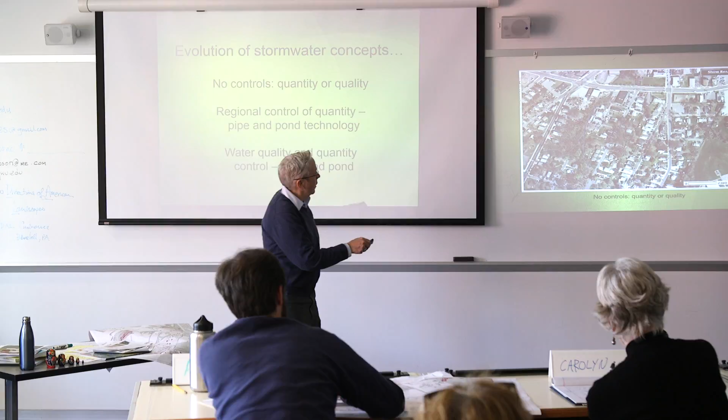So back in the day, they didn't manage anything. There's a stream that runs under this driveway, under this road, right up through these backyards, up into here. Looks like it might even go in a channel right there.

So there's no stream buffer, nothing. This applicant right here comes in, looks like a garden center or something, and says they want to do some development. And we're saying, well, you owe us, this is inside the beltway, so they would owe us a 60-foot buffer on that side. We're not going to make them take out half their business to put that buffer back in. We'll try to figure out a mutually agreeable, negotiated solution, but there's just not a lot of hope for doing restoration right in that spot.

But what we might ask them to do is go up in this system and look for places they could stabilize it. Because the water coming in through their property, if it was more stable, cooler in temperature—we talked about those things. So we'd ask them to look for a place up here where they could do some compensation, because they can't do the buffer on their property.

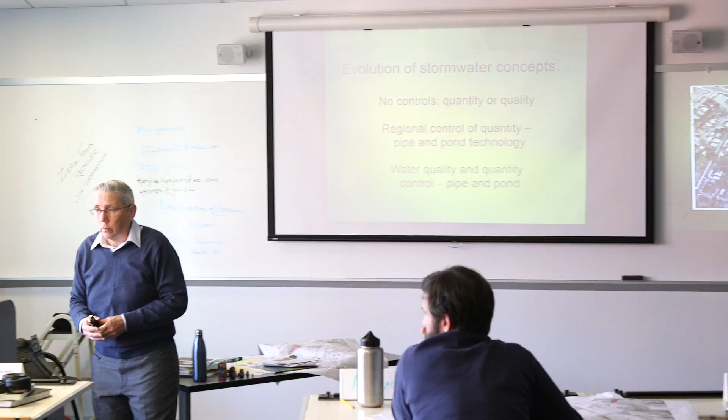You can only ask for that if they're doing renovations, right? Right, if they're coming in for a permit. Good point. Yeah, it's not self-implementing—you can't ask them after the fact.

No, we can't go in there and say you got no buffer, you got to shut down right now. If they come in and ask for something, we can say this is supposed to have a buffer, let's find a solution. Especially if it's something minor, we might not even say there's any mitigation needed at all. We might just say, oh, you're just coming in for a sign permit? You're good to go.

So originally there was no quality or quantity requirement. I would really like you to look at your watershed, your project, wherever you're going to be. Is there stormwater management? Because in some places there won't be.

So then we decided we had the solution. We said, well, let's do these regional ponds. There's a couple in Montgomery County. There was a whole plan to do like 100 of them across Prince George's to share the stormwater burden. You're thinking that's probably not such a bad idea.

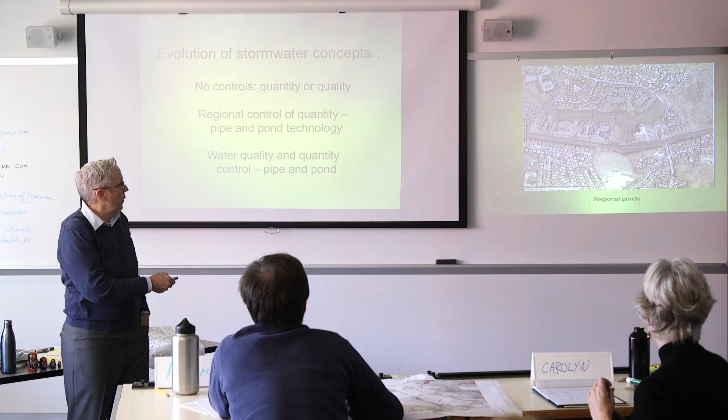So what they used to do is, you can see there used to be a stream here, and now they built up the road, so that's a dam. The dam, or the road, holds the water back, just like any other dam structure. And then here's the lake. It's very nice. There's a high-rise apartment building right there, and all these townhouses and some single families. Very nice development, right?

This was done probably in the early-ish 80s when they were first looking at regional ponds as a good solution. So this development's been here for a while.

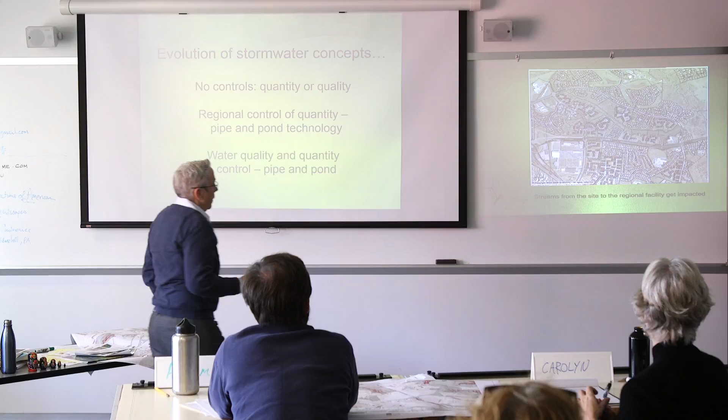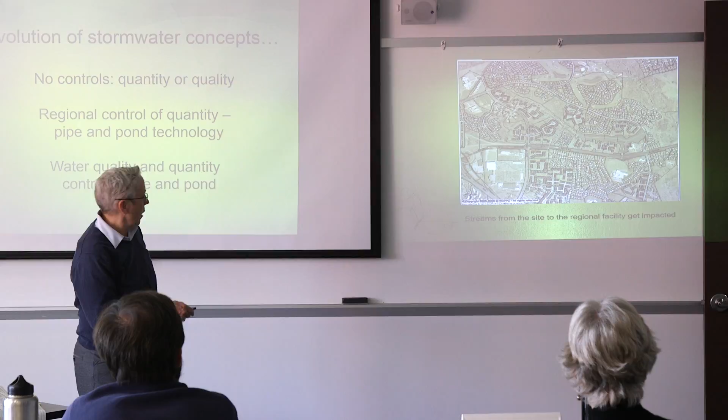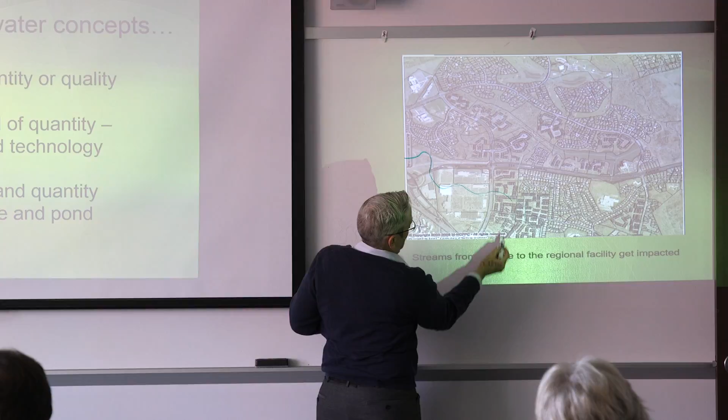So I'm zooming out a little bit. Here's the dam, and here's the lake. And you can see this line here - wow, it really doesn't show up - that's the watershed boundary, just like you delineated the watersheds.

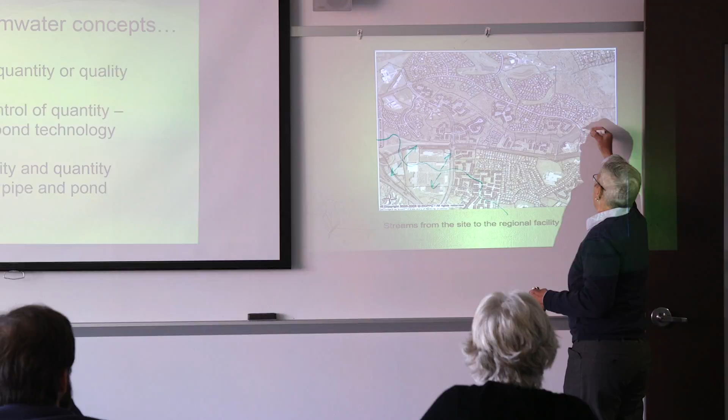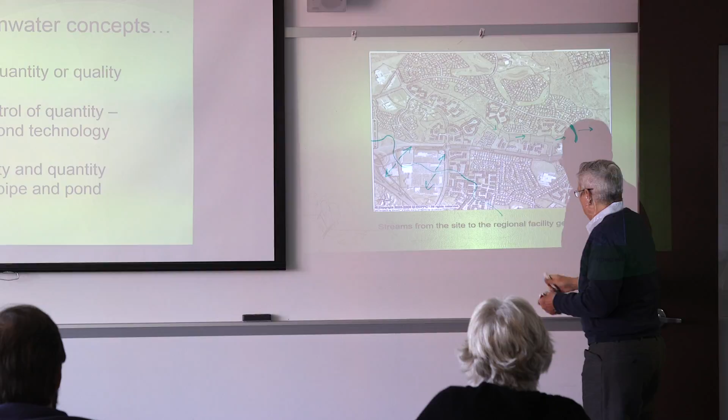So when they were designing this lake, they had to figure out how much volume and where it's coming from, and is it impervious surface or whatever. So that's coming this way. This is the dam, and this is going this way. So there's the lake here, and that's how the water is flowing off the properties, into this lake.

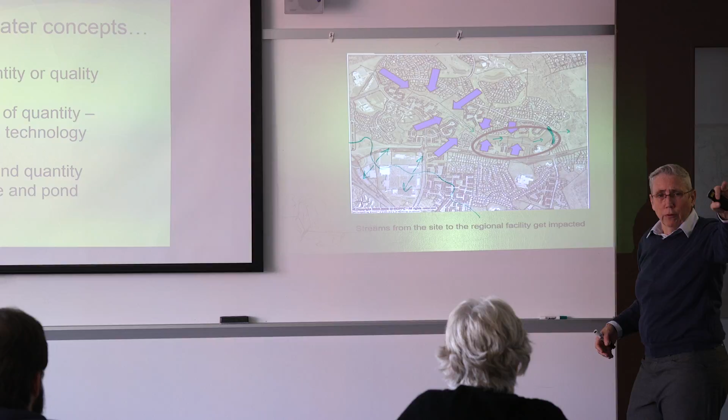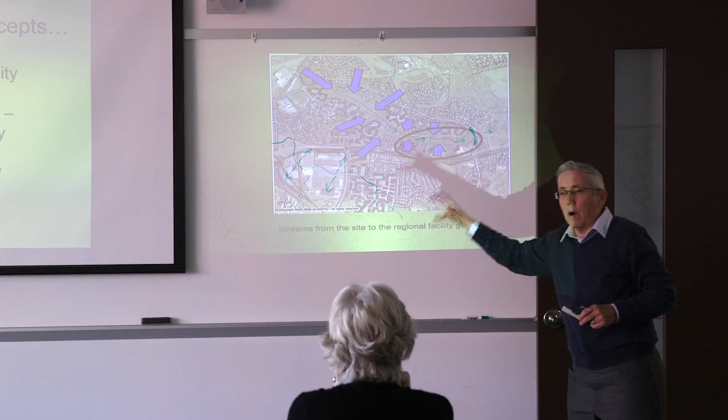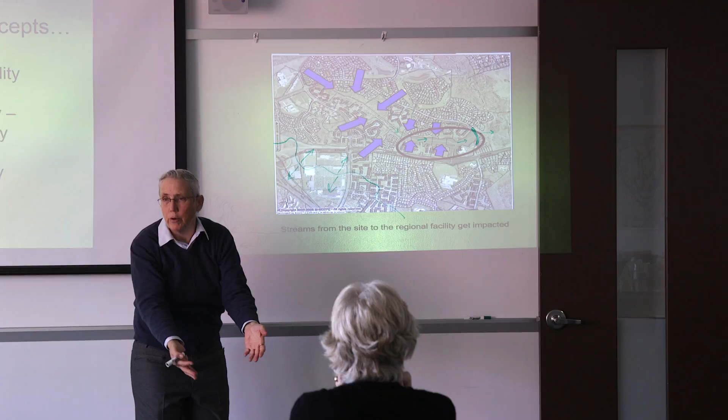But what we found, now that we've had like 20 years to look at this development and see what's happening - in Reston, Virginia, anybody familiar with Reston, Virginia? Planned community, they're finding the same thing, we're going to talk about them later - is that these streams feeding into this lake are becoming completely degraded. They're falling apart, their water quality is terrible, and that's because it's not a natural thing for these streams to get all this runoff with no treatment. So these streams are receiving water just running off of parking lots, running off of backyards, picking up dog poop, the whole thing, running right into the stream that then runs into the lake.

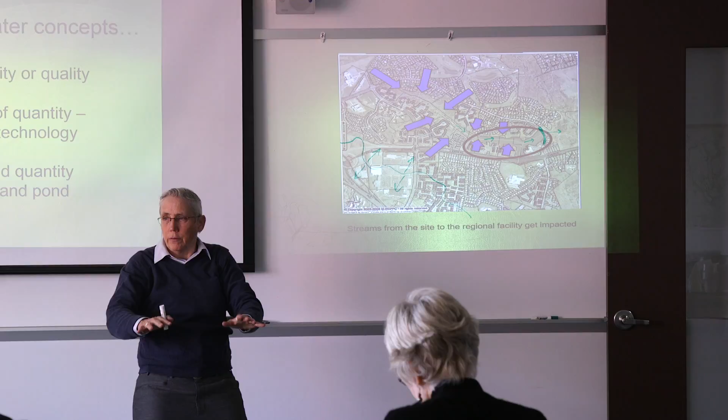There's no treatment up here. That's how the regional pond system works - they're relying on the pond to let the pollutants settle out, and that's what happens. They kind of settle because they're heavier than the water. And the wet ponds are better at cleaning up water than a dry pond situation is.

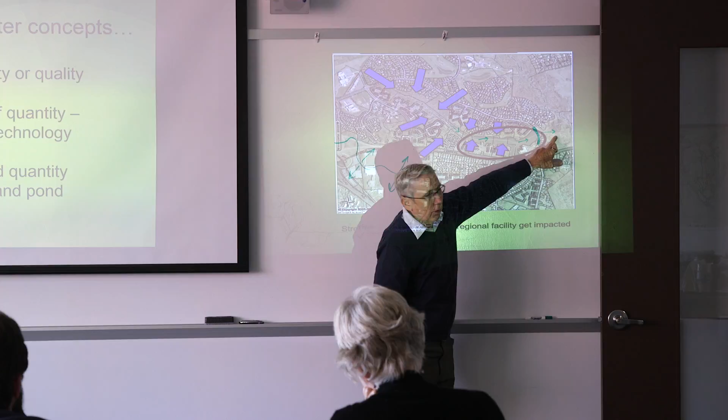So it slows it down. One bad thing is the temperature - temperature definitely goes up because it's all exposed to the sun, and when the water runs out under the dam, it's a fairly high temperature. So it's really messing with the ecosystem of that stream. It's completely gone, obviously, where the lake is, right?

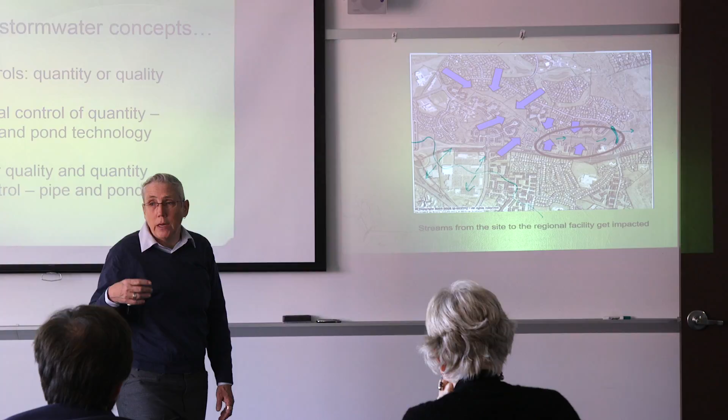So all of these streams now need to be stabilized. That's a huge amount of money. And Reston is doing it right now because they did the same thing in the 70s and 80s - they came in and built Lake Anne and all these little lakes around Reston. They're having all the same issues, and it's a huge multi-million-dollar issue to have to deal with. Nobody wants to do that.

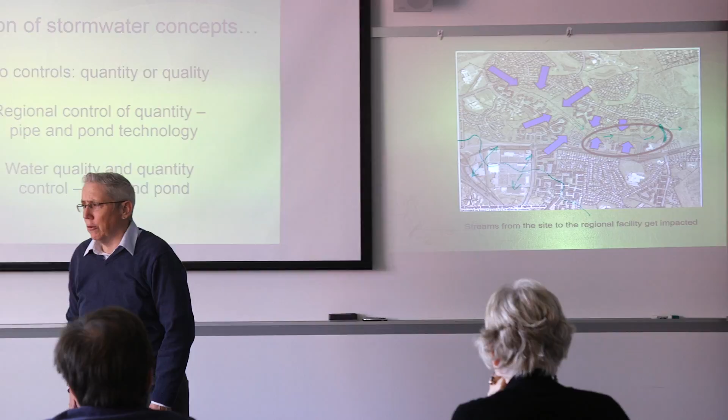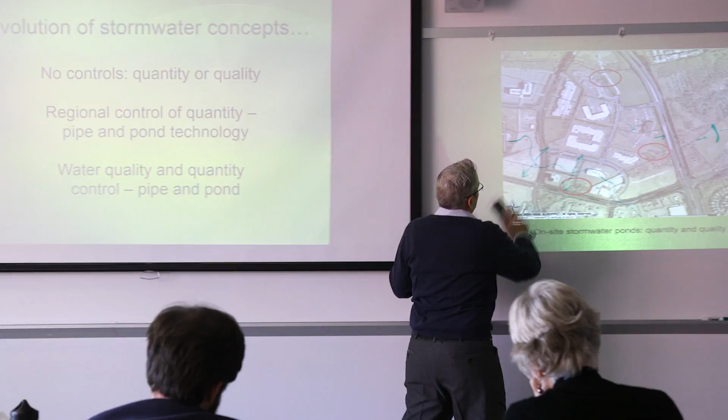So, regional ponds, not the solution. Throw them off the books. We're learning - it takes us a really long time, but we're learning. So then we said, okay, the solution is to have every single site, or if they're cooperating a couple of sites together, do their own individual stormwater management.

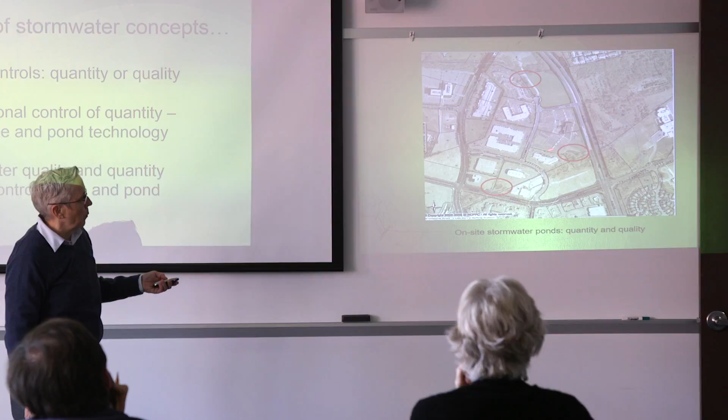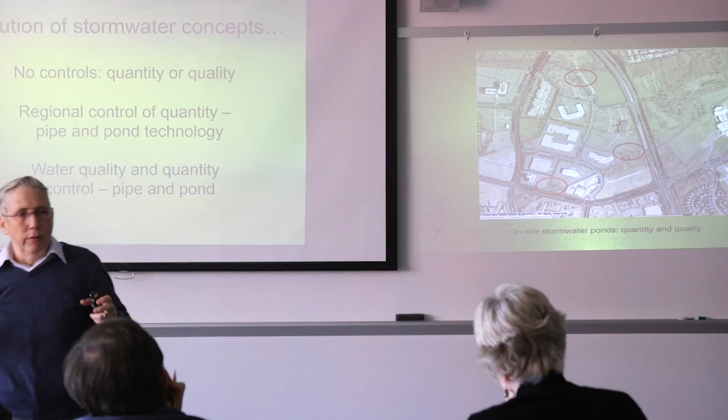So there's this for this piece right here. There's this for this monstrosity with all this parking that comes to here. Here's this one for these 4 buildings. So they're stormwater management ponds, which I always thought was a funny thing to call them because they're usually dry. So it's a dry pond - military intelligence, cafeteria food, kind of not the same, right?

So the idea was to capture it closer to the site, right when it's coming off the surface, but pipe it all to one facility that grabs it for either just your property or a couple of properties and holds it for a time to let some of the bad stuff fall out, then discharges it to the stream.

One hot mess. It's hot, it's still full of pollutants, it's a problem still. But the erosion that happened to the other streams was managed. This was mainly, especially at first, only focused on quantity.

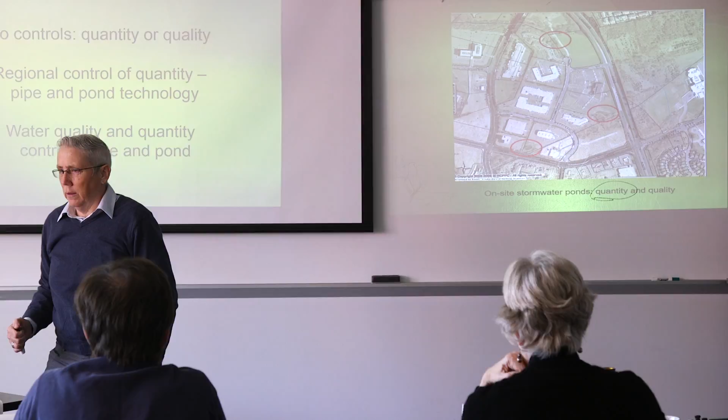They didn't care about quality because quantity was the overriding issue at the time, right? Oh, we got all these volumes, we're having these big storms, they're blowing out streams. What are we going to do? We're going to manage quantity. And if we get some quality benefits along the way, okay. Quality was never the issue during this time period, 70s, 80s, even into the 90s. It was just managing volume.

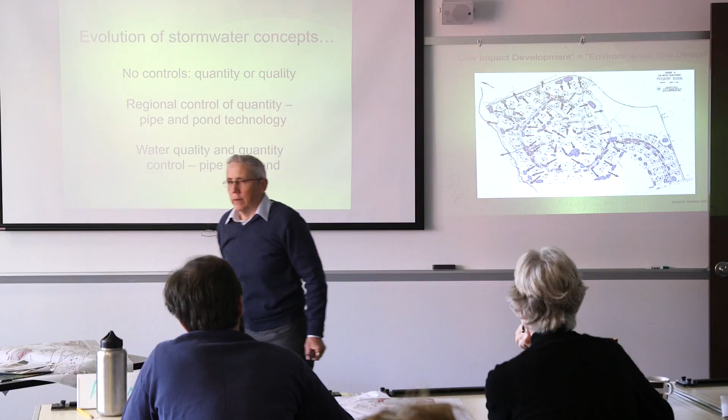So then we said, oh my God, Chesapeake Bay is still killing us. Or we are killing it. We got to do better. And the water quality reports start coming out. Dead zones in the Chesapeake Bay. No oxygen, plants dying, fish dying. Oh my God, we got to do it better. This is terrible. We're not making it work the way nature would intend. We are not biomimicking this right.

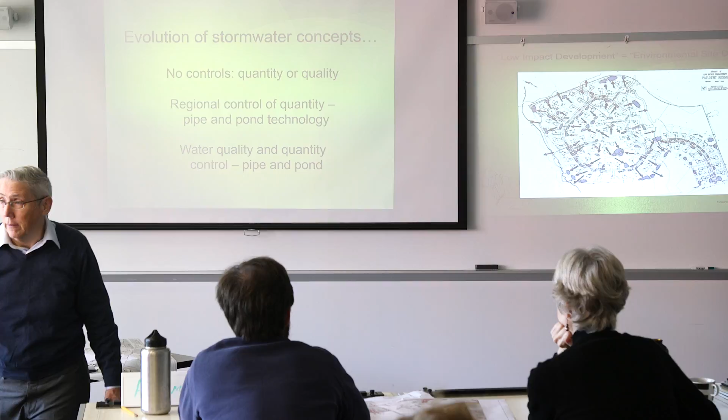I don't understand which part of this costs their money. You said it costs a lot of their money. The developers pay for that? Yeah, why this, the streams was stabilized and that cost money, why? I don't know. Okay, because what happened here...

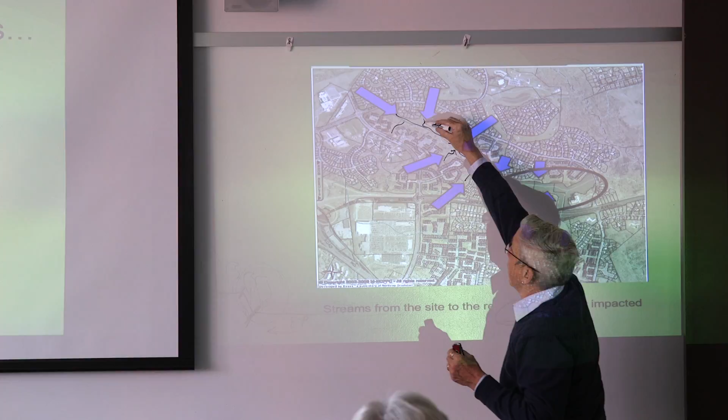So let me draw these in. So these are all, like we saw on our map, these are all streams that go into this way, that's going this way. Okay, so those streams would normally be very stable, the sides would be normal, it'd be all good.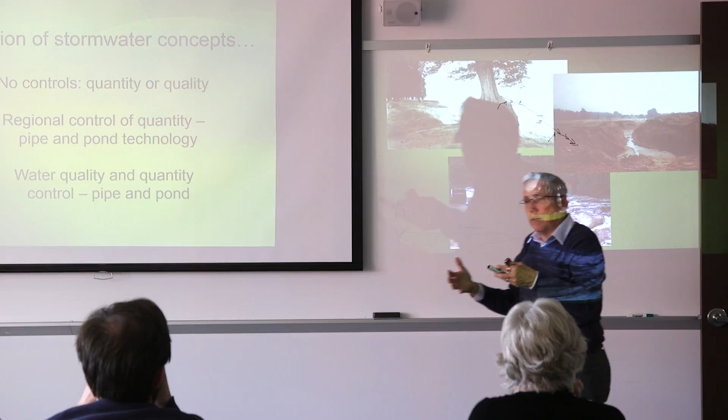This is kind of an exaggeration because there's still trees on both sides, but this is what happens. So to restore this and stabilize it, you have to go in, and there's a lot of different methods, but one way is to bring in some stone and plant trees in and around it to regenerate the stable sides that there were.

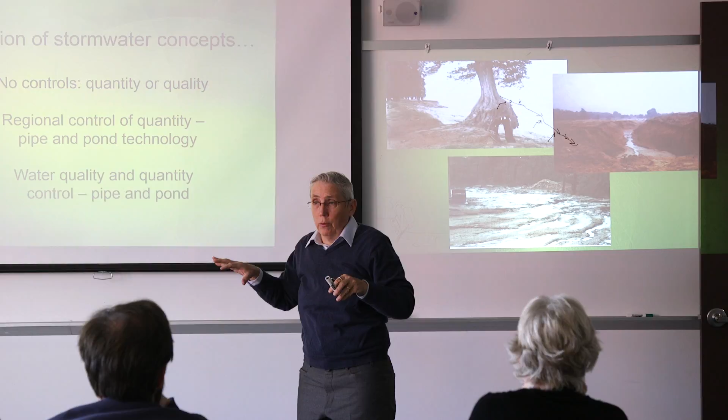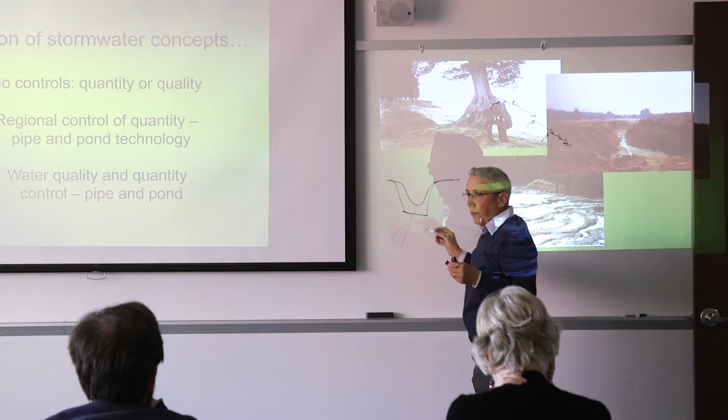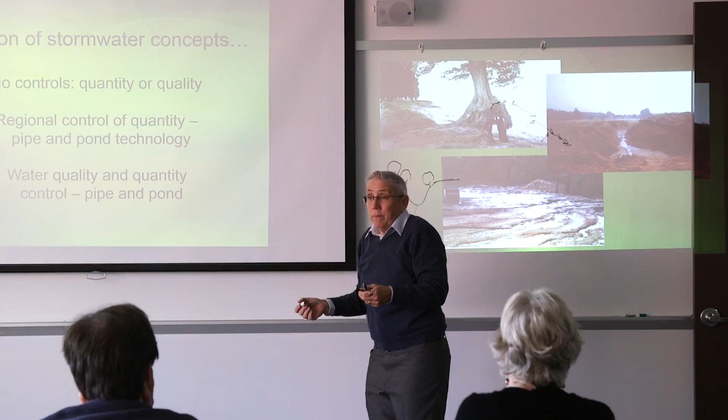So what happens is the stream in cross section, as you're looking, here's the water trickling out, that might be how it looks normal. But then after all the erosion, you've got steep banks on both sides with no trees, nothing left, it's all eroded. So you have to come back in and make it work again and plant trees. And that costs money to get all that stabilizing.

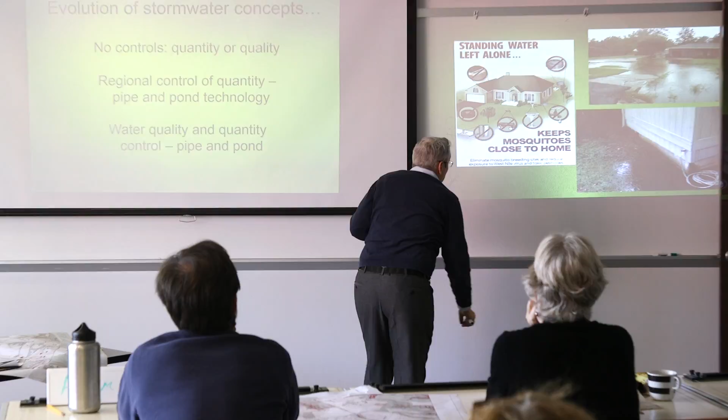Is that helpful? Okay. Yeah, don't ever hesitate to stop me because I speak a language of land development that I've always spoken, so I don't know when I'm off on a tangent, or not erasing my arrows. Okay, so enough of the trash.

So you see how it evolved. At first it was volume, then it was like, we really got to take care of the quality of the water because things are really bad. So then we said, okay, low impact development. Have you heard this term, low impact development? It mainly was focused on stormwater. And it's still kind of, in its definition, more just 100% stormwater.

So environmental site design is the term that the state of Maryland uses. It's also about stormwater, but it's also about saving native vegetation, reducing grading, which low impact development also was, but it's neither here nor there exactly what these terms mean. I just want you to be exposed to them so when you see them, you're like, oh yeah, that's stormwater.

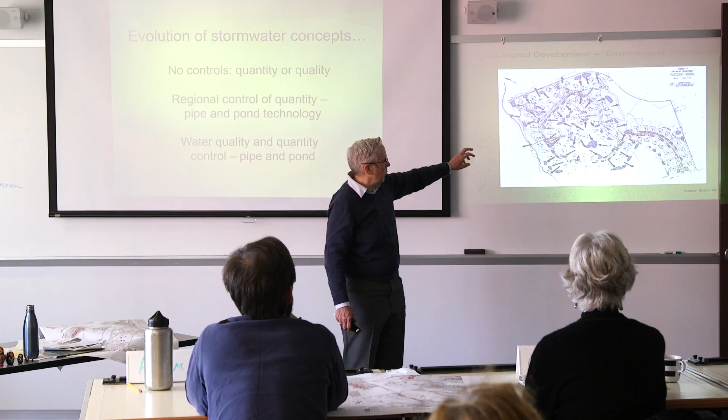Micromanagement. So I love this because this was the first subdivision done in Prince George's County, I think in the early 90s. That was the first one done using this technique. Hugely controversial because some people didn't like having these retention areas and vegetation on their property, but for the most part it was very successful.

I think it's interesting because I Googled it and it was on Boston's Metropolitan Area Planning Council website. So we're like, all right, Boston, you're taking the stuff from our county, that's cool.

But this micromanagement is what they did in this design. So even today, I think last year I pulled this up, I went into the aerials just to see, are these places that were supposed to be preserved still there?

Well, they are. Here's some tree preservation. That's a little rain garden that's capturing stormwater to get it to go into the ground. Same here, same here. For the most part, the system's working.

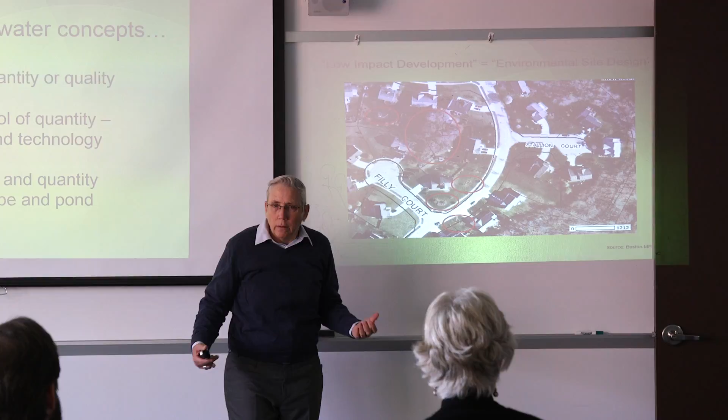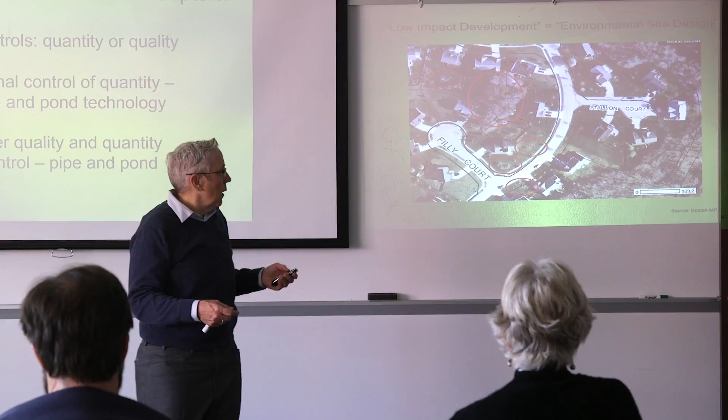They did have to come back in, because they didn't calculate the volumes correctly. So they had to come in and do a stormwater pond in the end. Which was kind of disappointing because you always want the first one to work, right, so that everybody says it works. But it's always an iteration. You have to come back and go, well, what didn't work, and we're going to do it better next time. And we certainly have over the years.

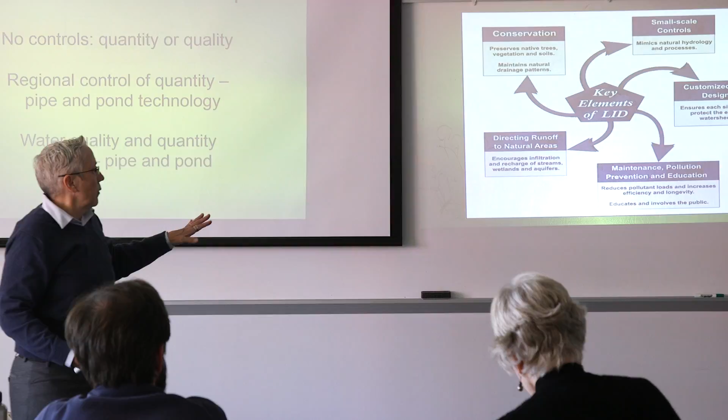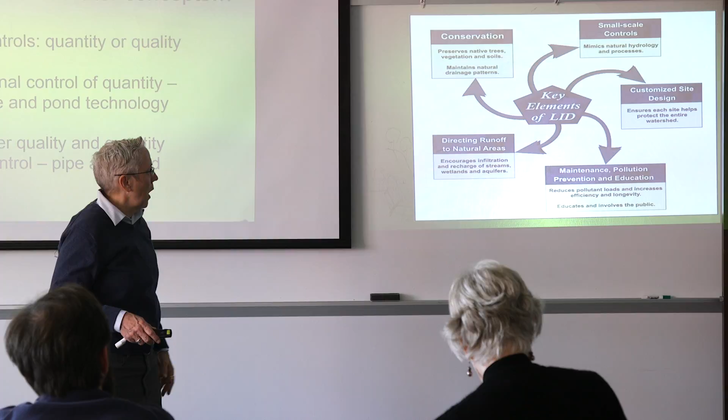So here's low impact development elements. You really start with this one right here: preserve native trees, vegetation, soils, maintain natural drainage patterns. This assumes you're going into a brand new site, never been developed before. So it's a little harder to do some LIDs using that one because you're not dealing with a fresh site.

Then you've got small scale controls. Mimic the natural hydrology and processes. Biomimicry, right? We're getting that water down into the ground as quickly and as efficiently as we can.

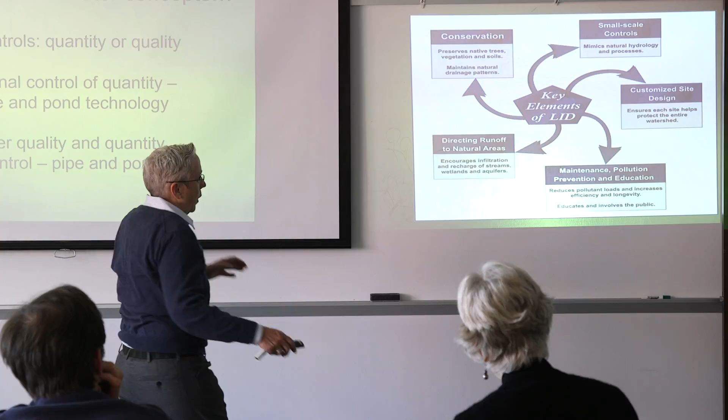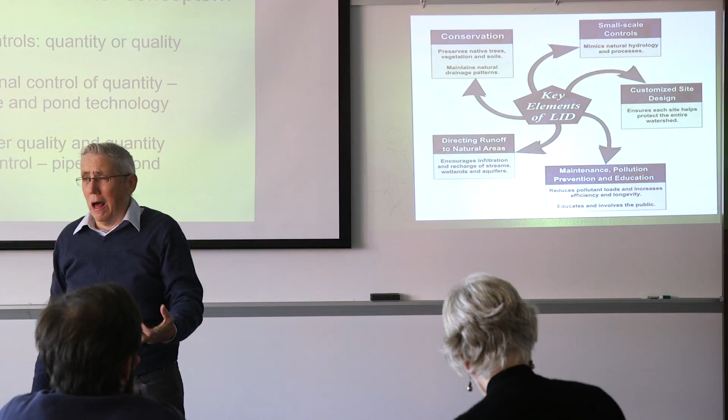Then you customize that site design to protect the entire watershed. You know how many subdivisions I saw that were just so poorly designed, they were just trying to get as many lots on there as they could for the client. I get it. But there weren't good decisions regarding which way the water was flowing and how the sites would be affected. Really important.

Probably the most important thing that wasn't very successful on that first subdivision was educating the new owners about what these things were. They also were not placed in conservation easements, which is what they do now. They also generally don't put them on individual lots, because you're relying on the property owner's willingness to maintain it, and that's just not happening.

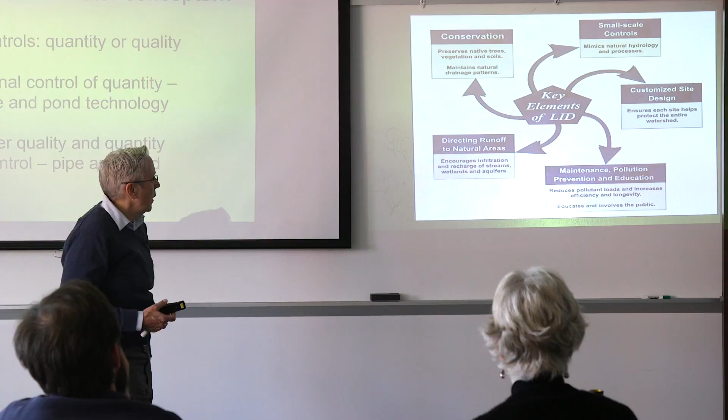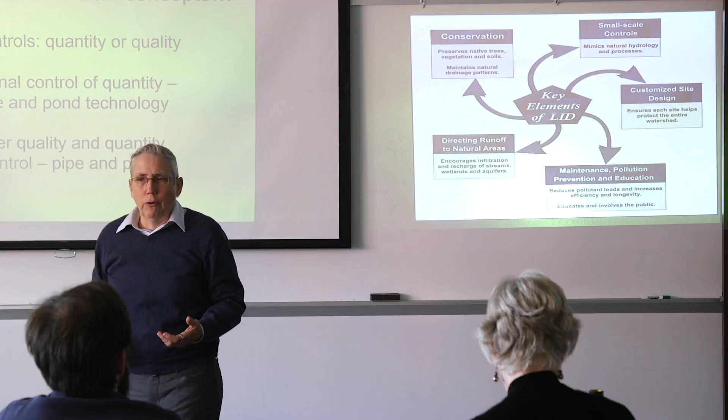So maintenance is very important, and then education, and then directing runoff to the natural areas. That's part of it too, but you have to have natural areas to be able to get the water to them for that to work. So good stuff. All right, so what does that look like on a site?

How does one keep, is it a problem in those retention ponds to start mosquito populations?

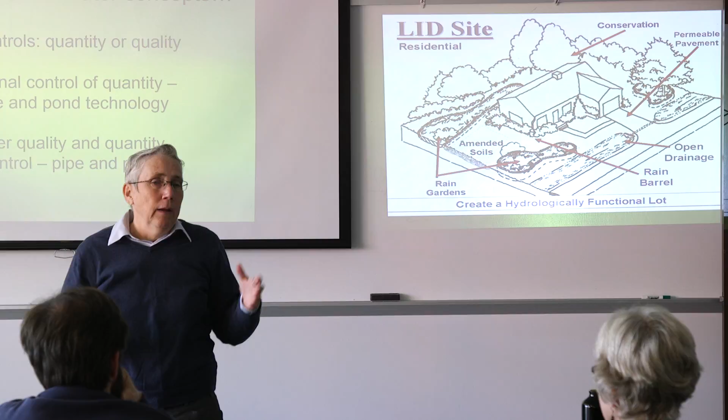What I always say about that is, if you have an efficient, well-balanced ecosystem that includes ducks and other things that eat mosquitoes, any kind of body of water will not be a problem. And mosquitoes actually prefer smaller things, like your dog's dish and puddles and stuff like that. While they will of course go in a big pond like that, they're more inclined to smaller surfaces. But if you bring all the elements of a wet pond to that area, including some wooded cover, and then you balance out the ecosystem, it's fine.

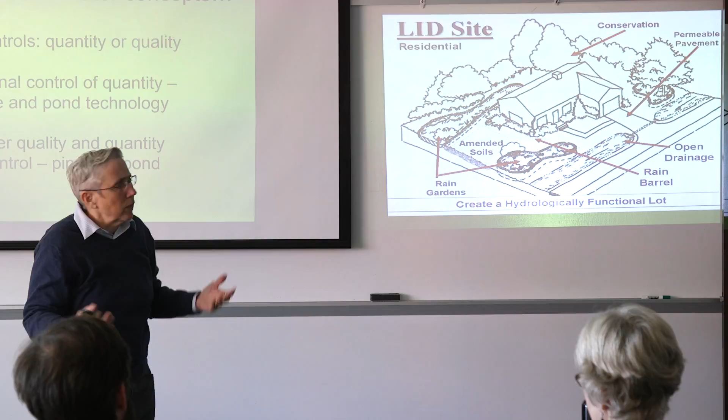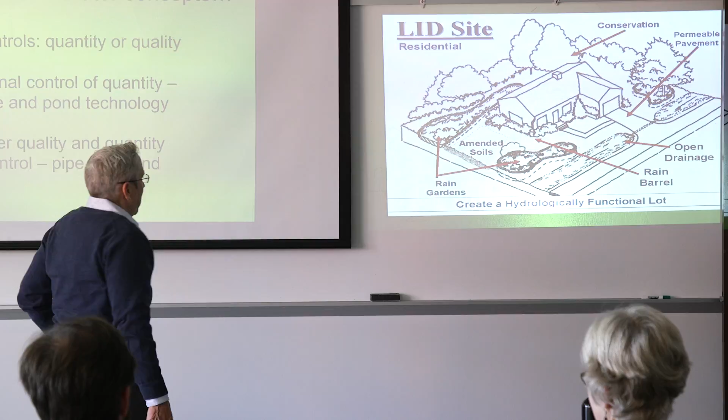That's the question we get all the time: I don't want this behind my house because it's going to draw mosquitoes. Well, you know what? There's mosquitoes everywhere. It's not going to draw them. Come on, people. An ideal pond situation would be that it drains and infiltrates it back into the ground, because those are easier to maintain than a wet pond is.

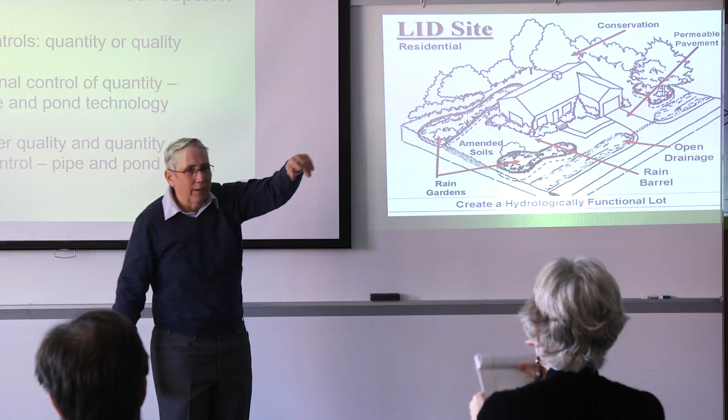Anyway, so what does it look like on a site? Well, you've got the conservation of the existing vegetation as much as you can. There's that permeable pavement driveway. Whose was that? Was that you, Carol? Yeah, there's your permeable pavement driveway.

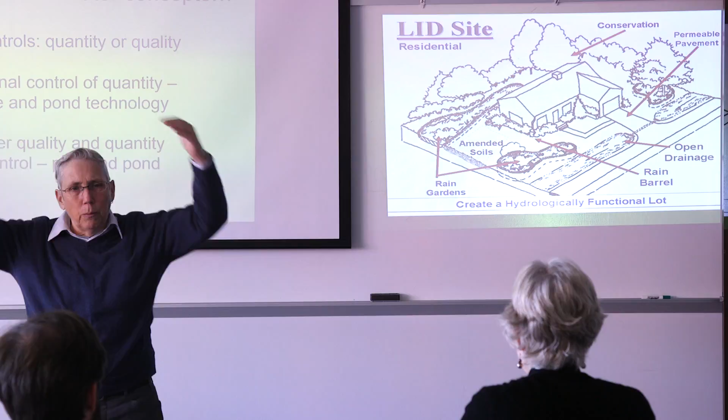Here's an open ditch. Instead of putting the stormwater into a pipe, you let it be in a ditch. Let it hang out. Let it evaporate. Let it infiltrate into the ground. As soon as we put it in a pipe, it can't evaporate, it can't infiltrate into the ground. We're stopping it from doing that.

Rain gardens, same thing, also known as bioretention areas. If you're wondering what the difference between the two terms is, it's really nothing. Some people would say a rain garden is a smaller bioretention area, or that a rain garden is less engineered than a bioretention area, and people use the terms interchangeably.

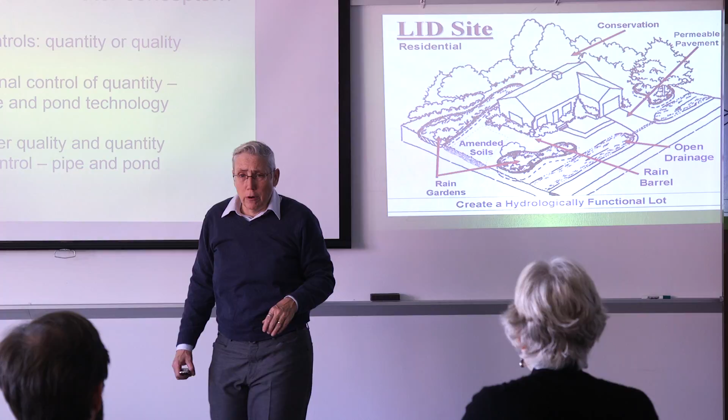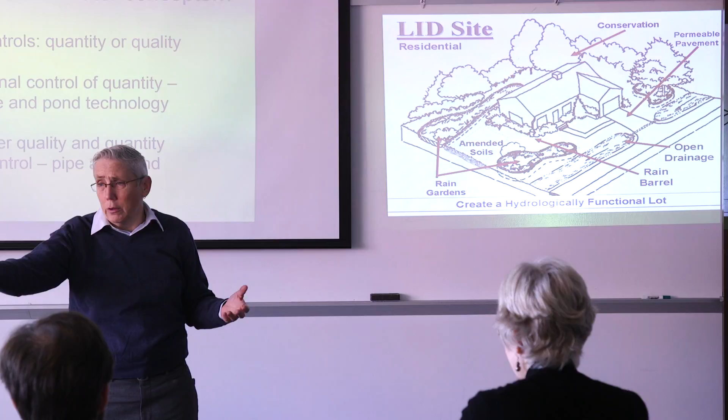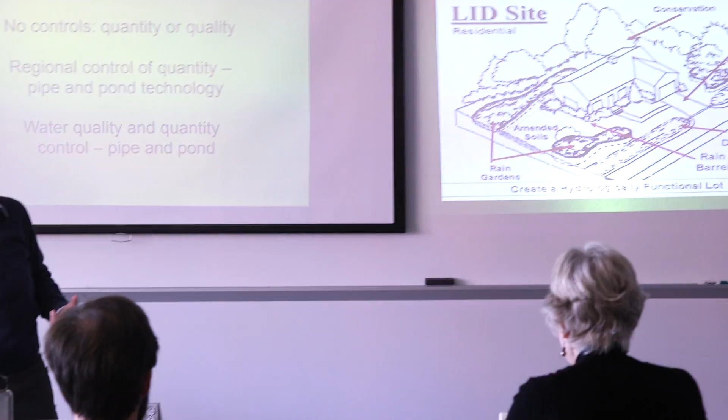By amended soils, they mean, hey, you've got a piece of turf, especially for you, Adam, somebody's got a piece of turf. You either take out the turf altogether and amend the heck out of it to make it infiltrate more. That's a technique you could use on your retrofit ideas. And if they want the turf, say, okay, we'll put the turf back, but we want to improve that infiltration, especially if you're trying to get to a zero runoff situation. So lots of ideas on a simple house design.

So this is one of the areas that I'm very interested in, down in the Outer Banks, where you have lots of renters and they're compacting the soil everywhere. There's already a 30% cutoff of impervious areas, so you have a very small, usually a driveway that can't hold all those cars, so the cars are parking on the grass. Sometimes they park on the septic field, and that happened to us once. But in these compacted areas...

That suggests to make it better, because you're going to have people parking no matter what. There's soil stabilization type methods you could do where, if you took it out and said, okay, people are going to park here, there's nothing we can do, you can put in a grid system. There's a lot of different designs that do this. Sometimes it's called Grasscrete. There's a product that does that. But what it is, it's a solid kind of surface with openings for infiltration, and then gravel or very fine soil gets placed in between the stabilizing structure, mat, whatever it ends up being.

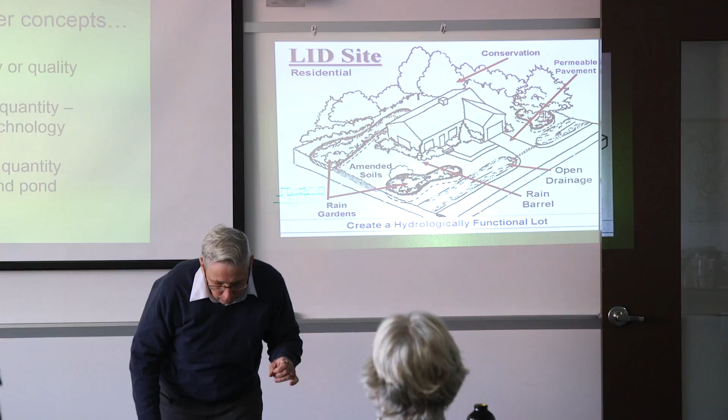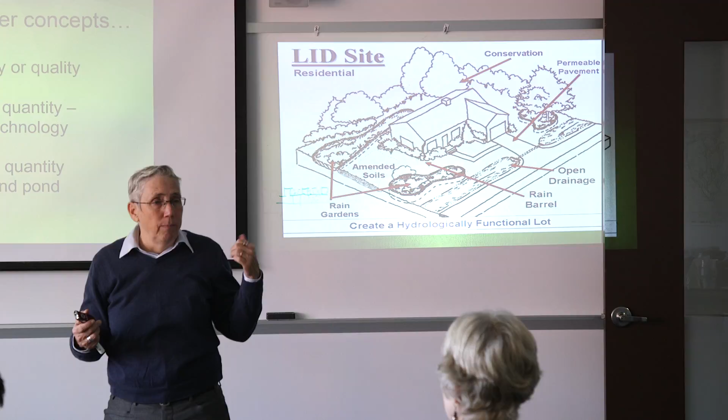Sometimes they're plastic. They use them a lot for, where they're most effective actually is, there was a library in Anne Arundel County where the ambulance people said, oh, there's a lot of old people who use the library, we want a path around to the back of the library to be able to get ambulances back there. And of course, my friend who was working on it, it's all green, right? Everything's green in this library. And she's like, you know, curses. So they used this kind of grasscrete thing that would be stable enough for a vehicle from time to time.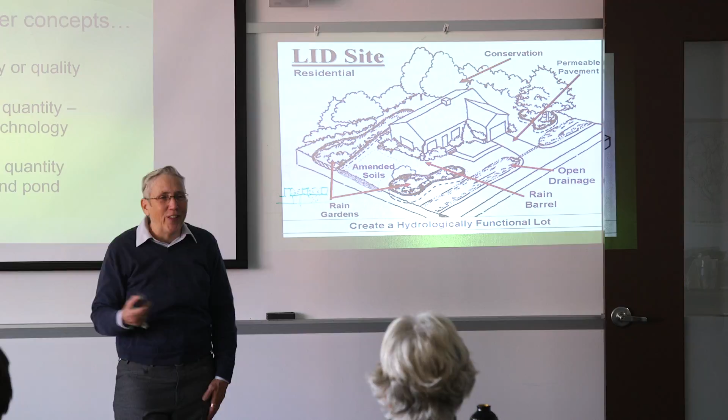That's the problem with these products, is that they're meant for from time to time. And if it's only on the weekends, maybe the grass would grow, I don't know. We had a church in DC that said, oh yeah, we're going to do this to reduce our impervious surface, because they were almost 100% impervious surface on their lot. And the gravel just went everywhere, and it never grew anything, because they used the facility all week long. So yeah, some of the products need a little help.

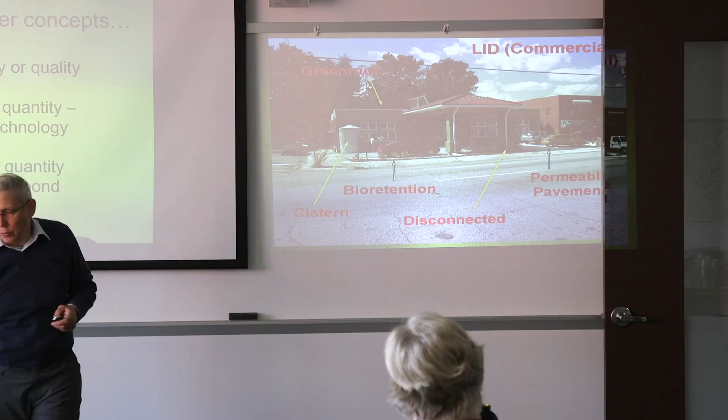So same thing with the commercial application. There's a great company, I don't know what the name of the town is, out 66 a little ways, called Wetland Studies and Solutions, WSSI. And the owner is very green, let's bring your dog to work, so I was like, yeah, sign me up. But they did their whole headquarters as a green building, and they have a huge cistern that they're so proud of, because they collected rainwater and use it throughout the building. So that's keeping it on site.

They're using it for flushing and stuff that goes into a public sewer system, so is that really purist, keeping it on site? Maybe not. But cisterns are such a great way to manage stormwater, and my prediction is they're just going to get more and more. They're like rain barrels on steroids, right? They're just going to get more popular as water becomes more of a resource to preserve.

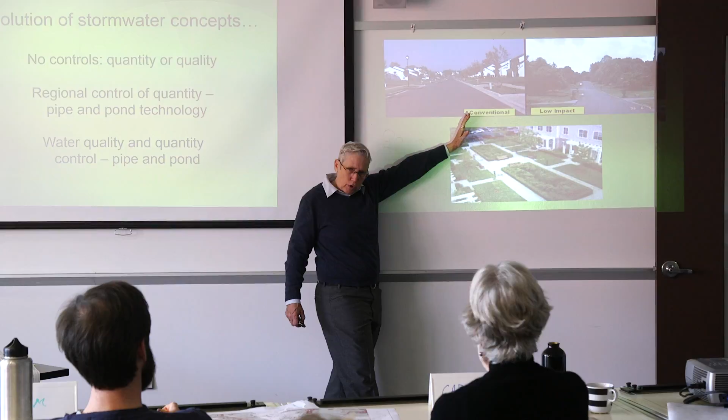Okay, so the big difference between a conventional subdivision and a low impact subdivision. Conventional subdivision, you've got curb and gutter, you've got sidewalks on both sides of the street. When do children unlearn how to cross the street? Pet peeve: do we really need sidewalks on both sides of the street? I don't know that we do. Cross the street, kids. And then here's low impact development: no sidewalks, no curb and gutter, open ditches, works great.

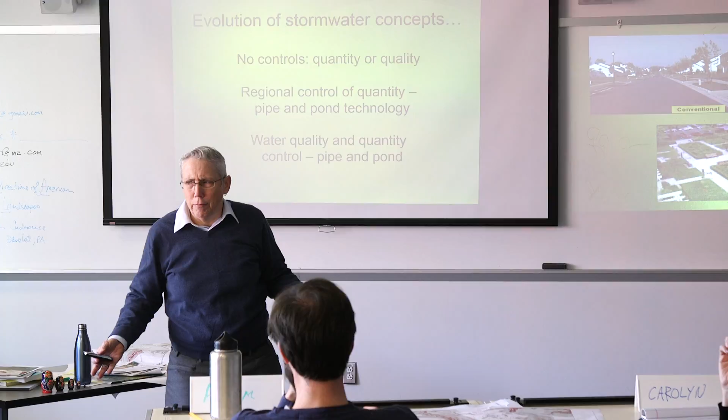You know what? People don't like it. Why do you think people don't like it? It's not ADA compliant, first of all. It's a subdivision, but if it's still part of the jurisdiction, it depends on where you are, but in like DC that wouldn't be compliant. It's not manicured.

There aren't sharp edges. It's like that, but it's low impact. It's low impact, but it was built in the 50s. And there's always an effort afoot: why don't the new people move into the neighborhood in the big new torn down, the big built up McMansions, and there's always this undercurrent of why don't we have sidewalks and gutters and curbs.

And it's like they're dying to get gutters and curbs. And those of us who've been living there a long time, it's like, no. Yeah, I've heard people arguing against sidewalks because they feel like they want their development to look rural. Right, therefore they don't want sidewalks. Or natural. Yeah, some people like it, some people don't. That's for sure.

This is a very fuzzy but still effective image. This is a little courtyard where these are bioretention areas in the center. Wouldn't that be beautiful? Come out with all kinds of plants and get to see things, and maybe there's a bench there, and the rainwater comes off the roof in the gutters and into these areas. So definitely lowering their discharge considerably.

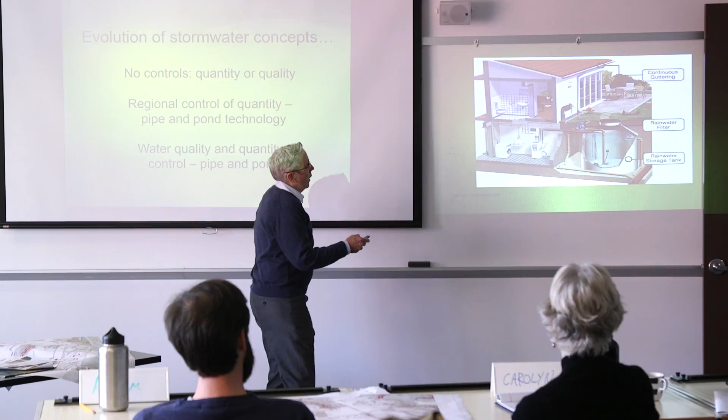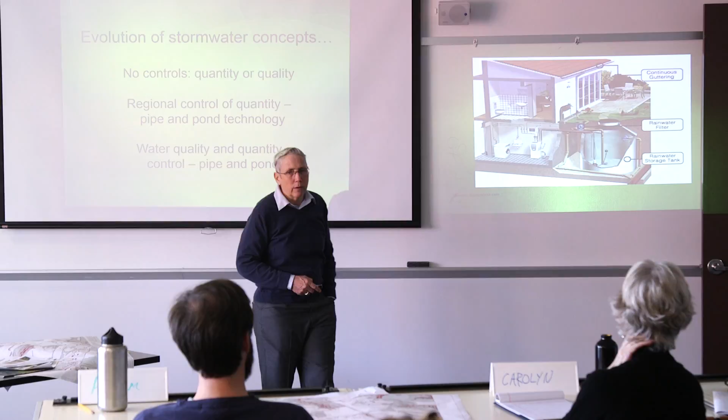I'm hoping for this house of the future that the continuous gutter captures all the rainwater, takes it down through a filter, into the storage tank, and then all that water gets pumped up to be used. There's water filter, sinks, dishwasher, or clothes washing, anywhere in the house that you need water, you've got it right there. What a concept.

Basically when you live on a well, it's sort of that system already. Adam, do you have a big tank in your basement that holds the water? Yeah. We did a project on a mountainside where we piped all their gutters into a septic tank, a clean one, and put a float on it so they could water their whole landscape from all the rainwater coming off the house. It's such a resource, we've got to start treating it like that.

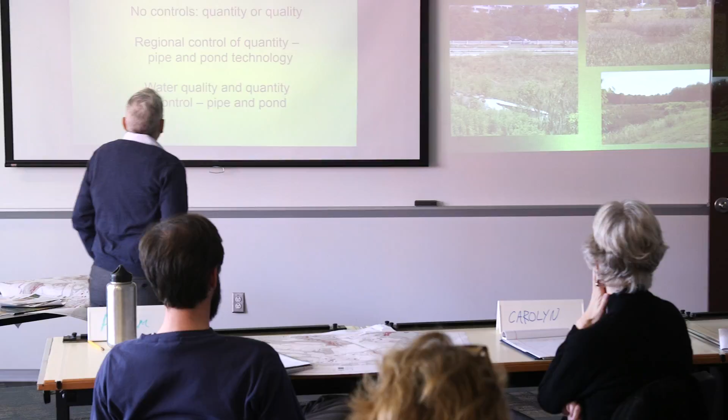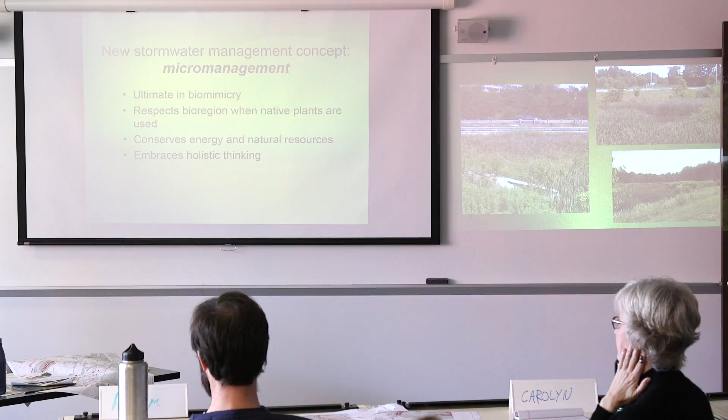So, where am I at here? I want to talk about this project real quick, because this is a good example of the new stormwater concept: micromanagement. So it's not a regional pond, it's not even a stormwater pond on your property in one location. It's managing it in small little pieces all over the site. It respects the bioregion when native plants are used, conserves energy, and embraces that holistic thinking. We're getting everybody involved. All this stuff is going to go right into the ground. Okay, so we talked about that.

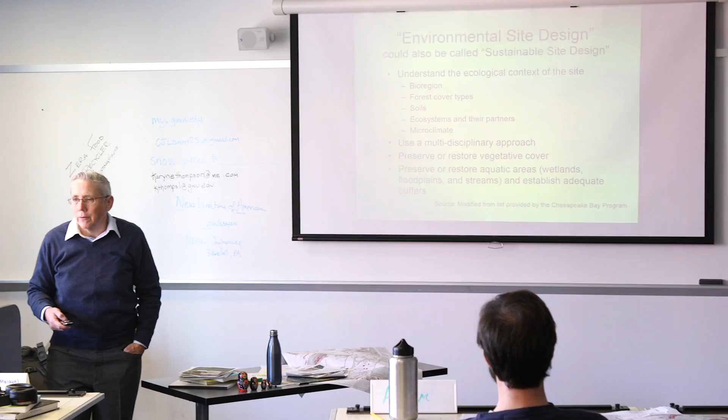So environmental site design, to do it well, you really have to understand the ecological context of the site. I'm going to talk about this in a minute, but this is a whole big wetland restoration, regeneration project that I worked on in Fairfax. We had to understand what plants grow there. Any landscape designer will say, in Maryland I'd always look for azaleas and how they're doing, because that would tell me you have acid soils. You look for indicator plants: what plants are showing up here? What plants should we be going with?

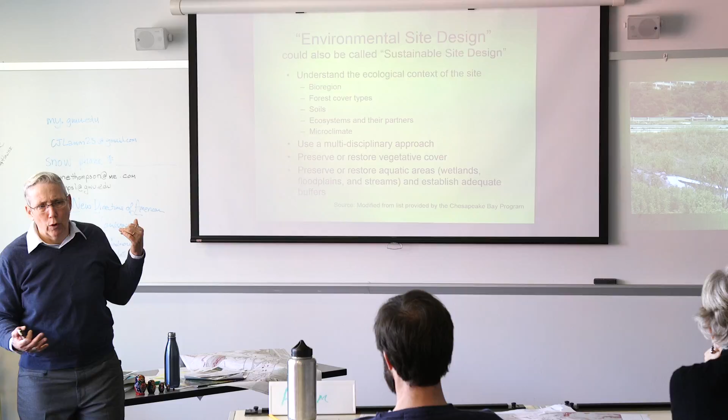There were huge sycamores just downstream from this site, so we chose sycamores as an iconic tree for this restoration. We went and looked at what was doing well in similar stream systems around, and you're going to do that in your watershed journal too. Go find a reference stream. Here you've got a stream that's really degraded; go find a reference stream that shows you what that stream should look like, and that's what we did for a project like this. So you really have to understand all of what's going on there.

Okay, so multidisciplinary approach, preserve what you can, and preserve and restore these aquatic areas. All of these things go into environmental site design. You could call it sustainable site design if you wanted to.

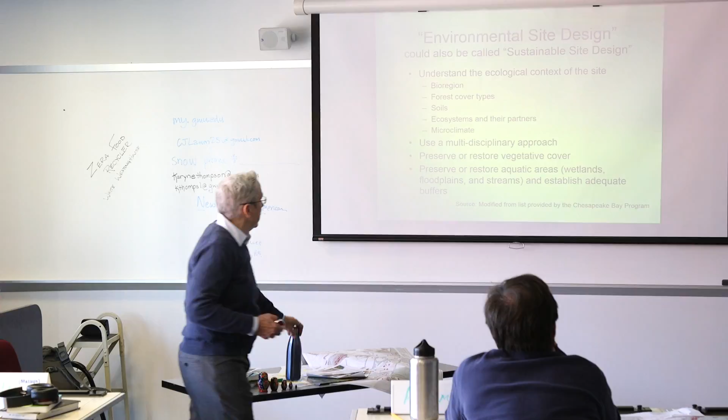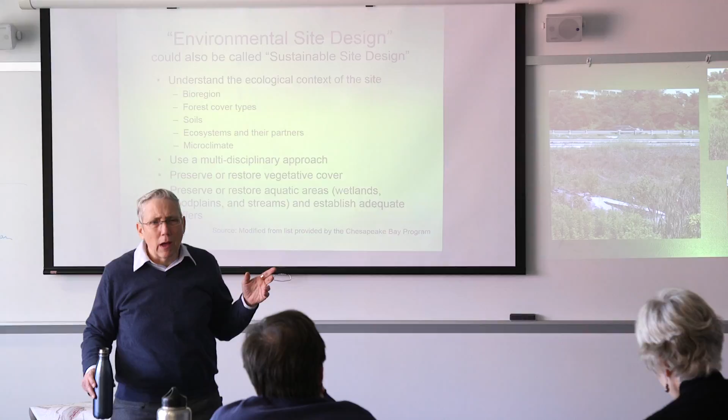So this was an environmental site design in the late 90s. We weren't thinking about sustainable design or ecological design, but I was working with the owner of Wetland Studies and Solutions, and we rolled up our sleeves. This was all developer paid for, because they were coming in to build on the adjacent site, and this whole stream system was completely blown out by Fair Oaks Mall. Fair Oaks Mall was built, I want to say late 70s, early 80s, with almost no stormwater management. It was like 20 acres of impervious surface, and it dumps out to that outfall.